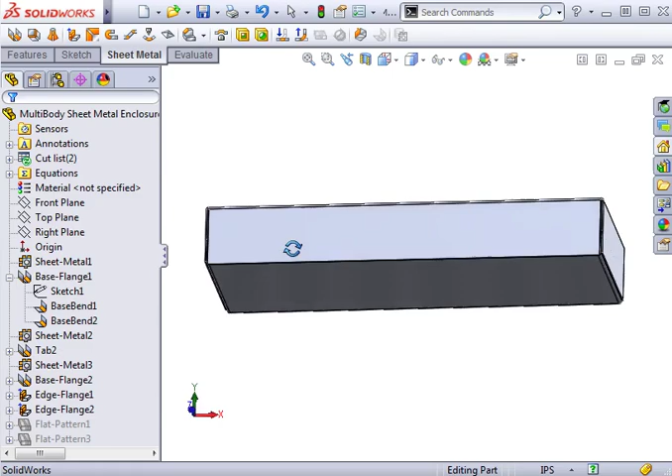SolidWorks allows you to create your sheet metal designs using the same multi-body design techniques as with regular parts, but there is some added flexibility that makes this particularly useful when working with sheet metal. Oftentimes, designs require several pieces of sheet metal that get assembled together. If you're comfortable using top-down assembly design, then you know how powerful it can be having in-context features that drive the geometry for both pieces of sheet metal.

With multi-body sheet metal design, the same power is extended to the part level without the need for any complex in-context file relationships. In this example, I want to create a simple top and bottom cover for an enclosure. I'll create both bodies here in the same SolidWorks part file. I'll get started with a basic sketch for the bottom cover.

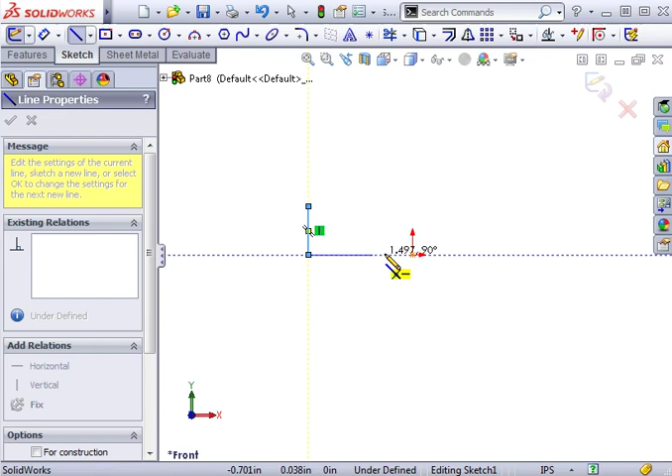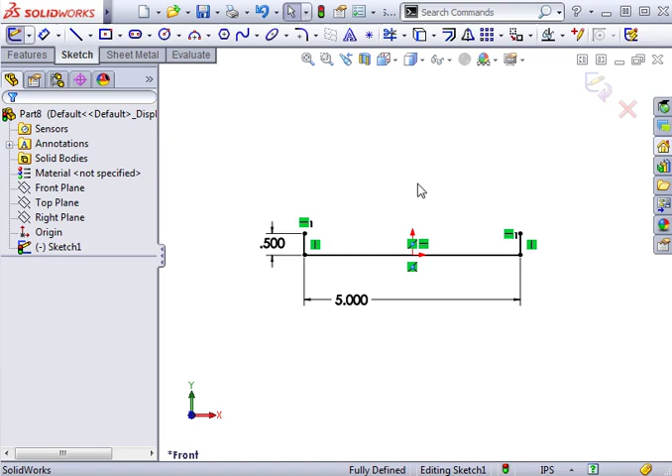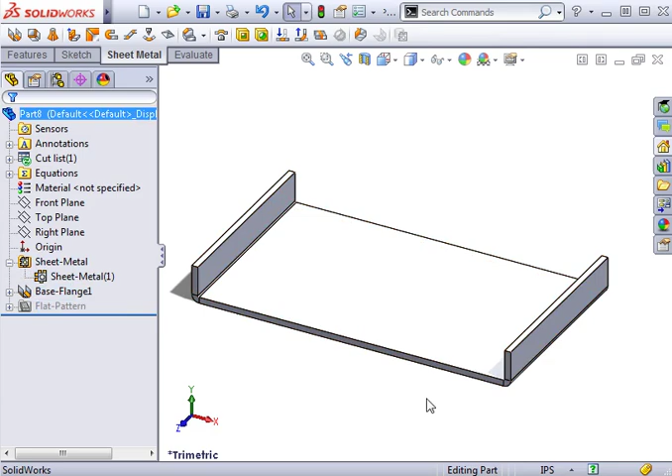Give it some dimensions. And create the base flange. Notice in the feature tree, a sheet metal feature has been created along with the base flange and flat pattern. That's all I'll create for now for the bottom cover.

For the top cover, I'll start a new base flange on one of the bottom cover's side flanges. I'll start a new sketch on it, and I can take advantage of the edges or points on the bottom cover by using sketch relations to define the size of the new geometry.

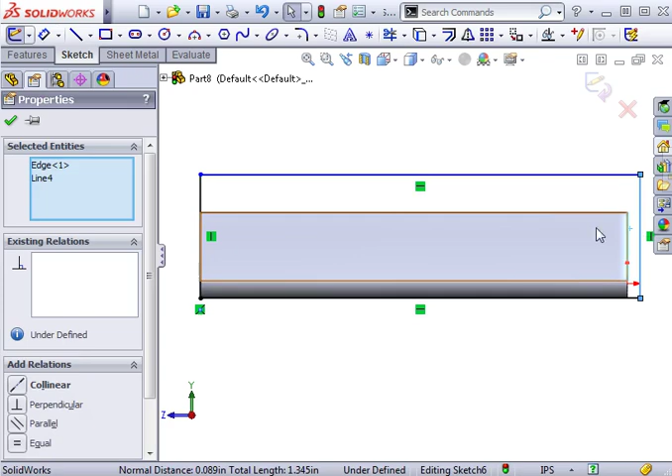Again, this is similar to top-down assembly design technique, but it keeps things simple by using relations within a single part file. That way, if the bottom cover ever changes size, then this flange for the top cover will update automatically. I'll add a dimension to fully define it, and click on the Base Flange tab icon.

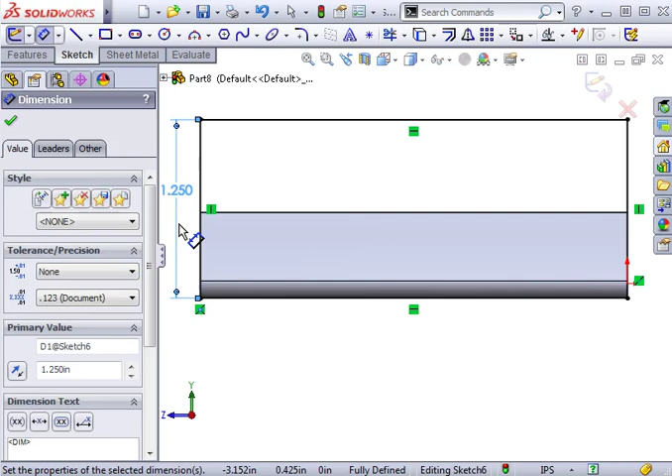Now, if this were to be a simple tab feature in a single body sheet metal part, SolidWorks would absorb the overlapping sketch segment, and this would effectively extend the original flange. But in this case, I want to create a separate body, so I must uncheck the Merge Result option. I'll make sure the new flange is being added to the outside of the original flange, using the Reverse Direction option if necessary, and click OK.

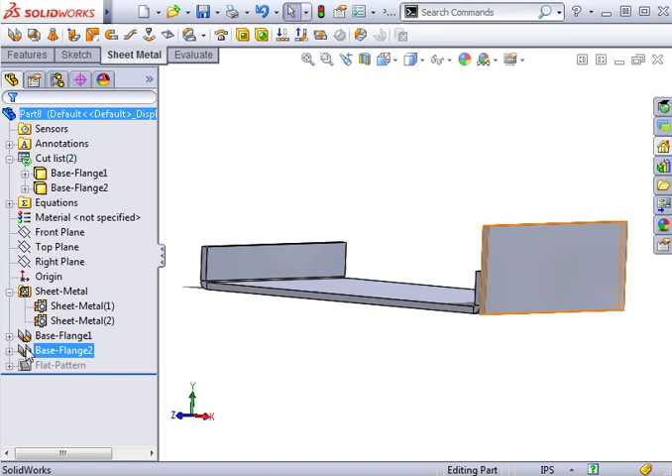When I do, the flange is added, and a couple new items appear in the feature tree. Notice there's a Cut List folder which lists both sheet metal bodies. Also, notice how there's now a sheet metal folder containing both sheet metal bodies, as well as a flat pattern folder for the flat patterns. Any new bodies or flat patterns that are created will go into these folders.

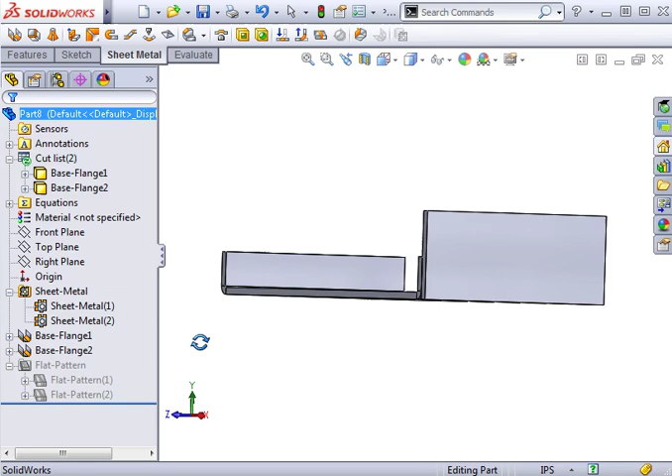Now, another advantage to designing sheet metal with multiple bodies is that there may be times when you want to work on another area of the design before joining those areas together. In this case, I'll create the next flange for the top cover on the other side. And just as before, I'll start a sketch and use the rectangle tool to take advantage of sketch relations to control the size of the flange based on the existing features.

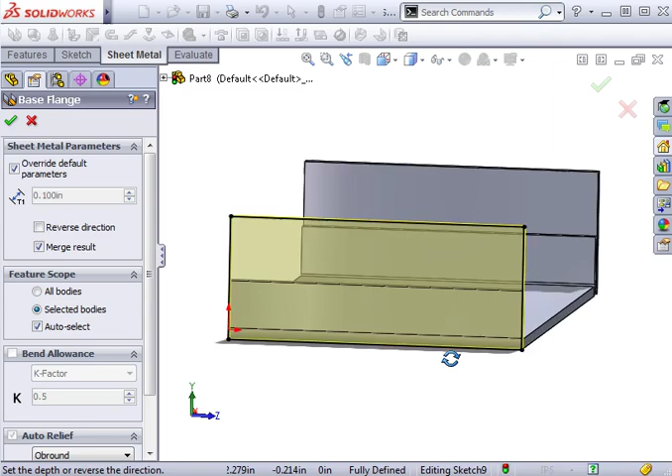I'll click the Base Flange tab icon, and again, uncheck the Merge Result option so it doesn't add this as a tab to the bottom cover. I'll make sure it's being added to the outside of the bottom cover, and click the green check. The flange is added as a new body, and in the feature tree, you can see it listed in the Cut List section, along with the addition of the third sheet metal and flat pattern features in the folders.

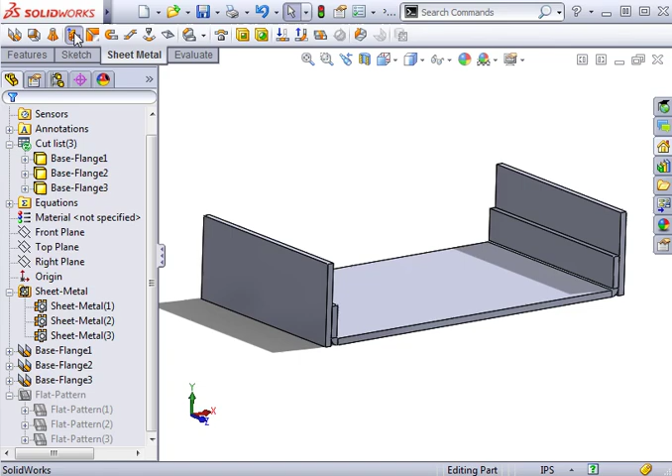The next step is to merge these two flanges for the top cover into a single body. This can be done easily by using an edge flange. All I have to do is click on one of the edges. And to combine it with the other side so that they merge together, there's an end condition for this edge flange that I must use called Up to Edge and Merge. With this option selected, all I have to do is select an edge of the other flange. When I do, you can see a preview of the resulting bend.

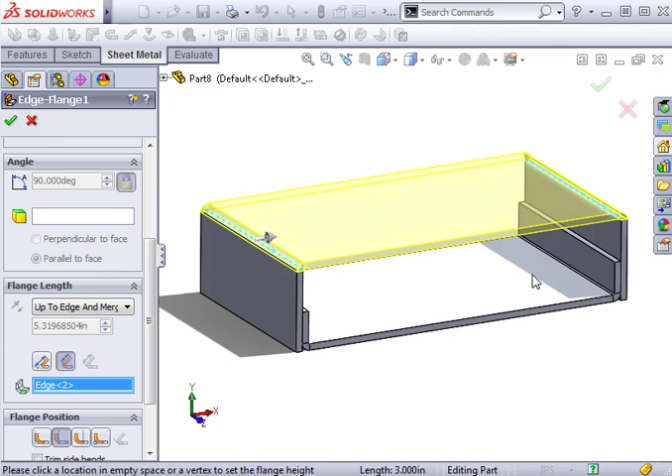Something to keep in mind when merging two sheet metal bodies with an edge flange is that both bodies must have the same thickness, since these will both share the same sheet metal feature, and that the edge you select to merge them must be linear and parallel. I'll click OK, and the feature is added, and both side flanges are merged into a single body.

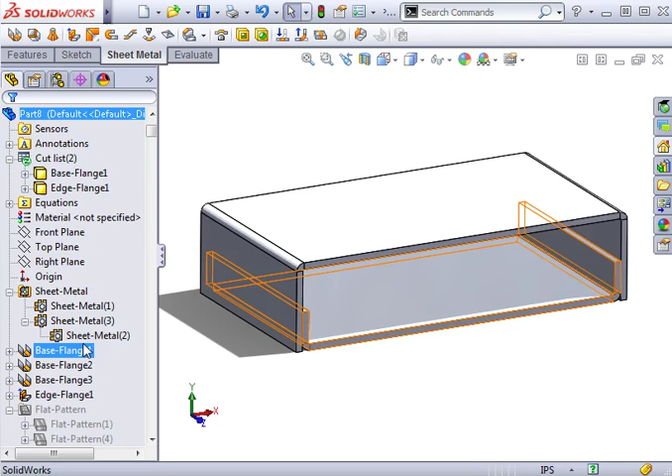Notice in the feature tree there are only 2 bodies in the cut list, as well as only 2 sheet metal and flat pattern features. However, if I expand the second body in the sheet metal folder, you can see that the second body is indented under the first body. The second body retains its own sheet metal parameters, but it's no longer a separate body and is instead controlled by the first body. I can add another edge flange to finish up the enclosure.

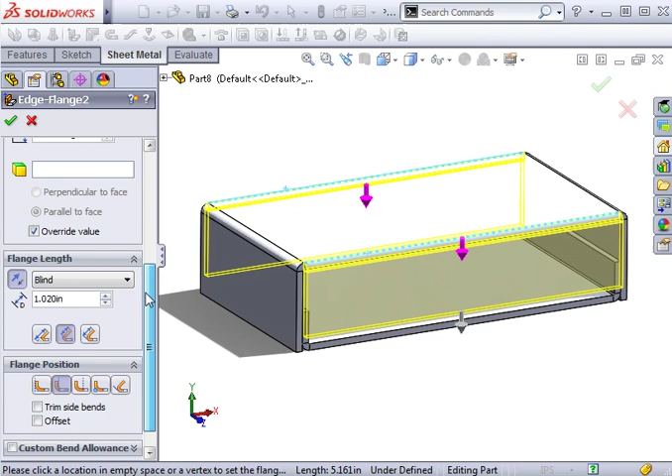And this time I'll select one of the edges of the bottom enclosure to extend the flange up to, and SolidWorks will use an Blind end condition. The bodies will not be merged unless I were to use an Up to Edge and Merge condition, and the feature is complete. At this point, it would be simple to add additional tabs, cuts, or other features to each of the bodies, and the enclosure design has all of the built-in references and design intent to behave as expected if design changes are needed.

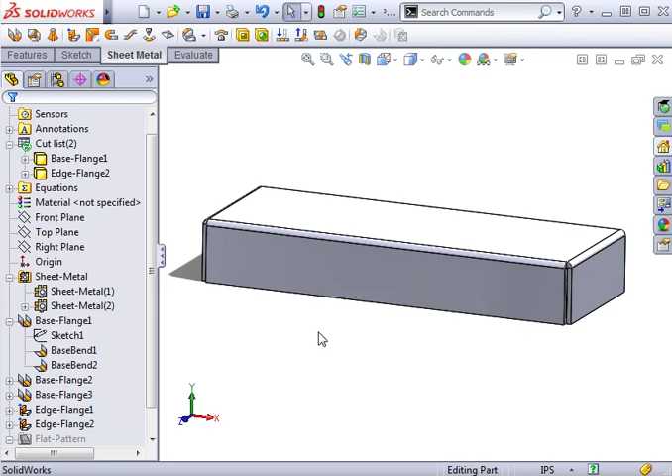You can also flatten the bodies individually by clicking the flat pattern feature for each in the tree. Keep in mind, only one body can be flattened at a time, so you'll need to exit the flattened state of one body before you can flatten the other.